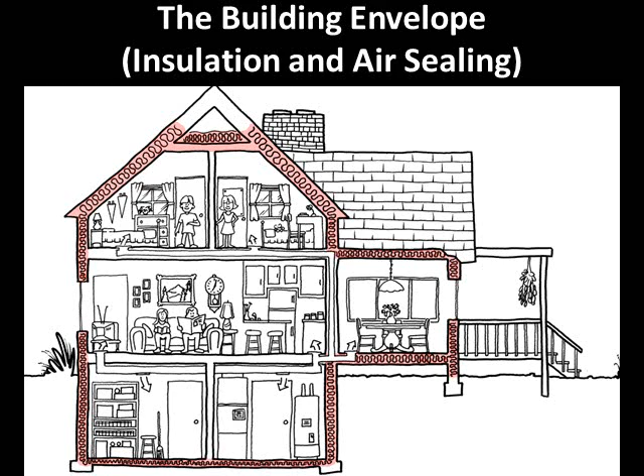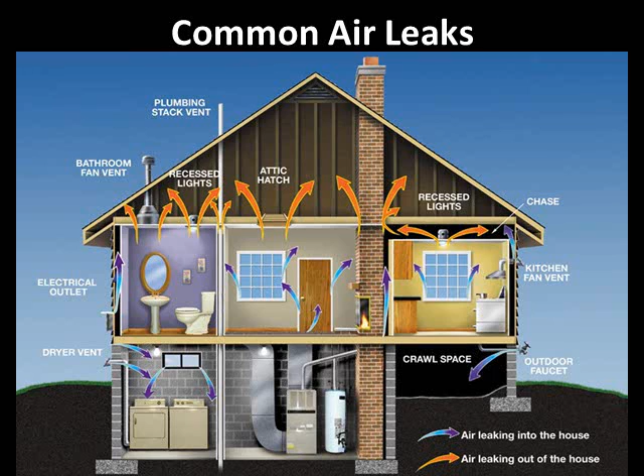Breaks in the building envelope result in uncomfortable drafts, hot and cold rooms, and serve as a route of entry for moisture, noise, dust, pollutants, and also pests.

Undesired airflow through the home can be a result of the stack effect. Take, for example, a cold winter day. Generally, hot air rises, so it tends to flow from the bottom of your house to your attic, where it will escape if you haven't air sealed that part of your house. When this happens, cold exterior air rushes into your basement to compensate for the warm air that has risen through your attic and gone outside. This creates a cycle, with cold air rushing into your basement, heating up, rising into your attic, and escaping outside, forcing more cold air to rush into your basement to compensate.

The adage, 'If your feet are cold, put a hat on,' also applies to air leaks in your home, and is a great example of the stack effect. Most of the cold air coming in, usually through the basement, is replacing warm air that is leaking out, mostly through the attic.

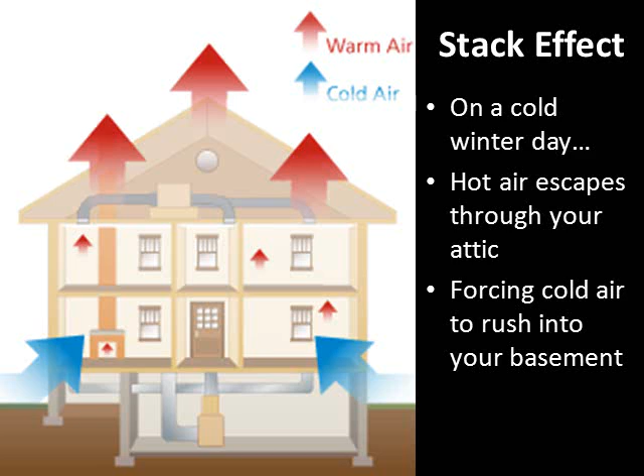I'm going to give you some examples of why it's important to take a comprehensive whole house approach. Many people consider air sealing on their own. If you decide to seal the air leaks you can detect, you could end up sealing some leaks while air rushes through the remaining leaks at a faster rate. This is much like putting your thumb over the nozzle of a hose—the air flows through a smaller space, but at a much higher rate.

Many people also consider insulating their attics on their own. However, if you add insulation but don't air seal, you could end up with a moisture problem. This goes back to the stack effect. In your attic, you have a thermal barrier but no air barrier, so the stack effect continues uninhibited and hot air keeps flowing into your attic and escaping outside. Because you've added insulation, the attic's temperature will be cooler, causing the hot air's temperature to rapidly drop, and the moisture in that air will rapidly condense, creating a moisture problem. This will also degrade the insulation, because it must remain dry to be effective.

There are two parts to a home energy retrofit. To take a comprehensive approach to home energy efficiency, it's important to first accurately diagnose the source of energy loss with a home energy assessment conducted by a building analyst. During the second part, technicians implement the most cost-effective recommended energy upgrades.

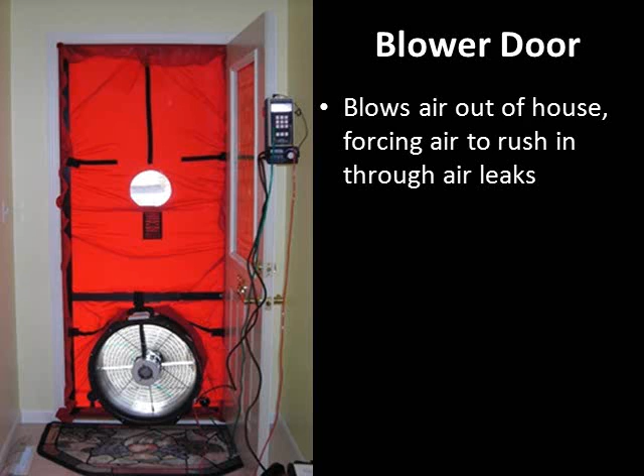The building analyst uses advanced diagnostic equipment to locate air leaks, determine the effectiveness of your existing insulation, rate the efficiency of your appliances, and measure moisture infiltration. One important piece of equipment is the blower door, which blows air out of the house, depressurizing it so that air rushes in through all of the air leaks.

This allows the contractor to do a number of things. First, the building analyst is able to accurately diagnose the location of air leaks with pinpoint accuracy. Second, the blower door also measures the rate of air infiltration in and out of the house, which allows the building analyst to use it for quality assurance.

By conducting a blower door test before and after the energy upgrades are completed, the building analyst is able to evaluate the effectiveness of those upgrades. Generally, the building analyst will determine a target level of airflow reduction. If the technicians do not meet that target, they will be sent back to do more air sealing.

Finally, the blower door serves as an important health and safety function. Using the blower door ensures that the technicians do not seal up the house too tightly. There is an optimal level of airflow in and out of the house, and too little airflow would result in an unsafe living environment—similar to placing a plastic bag over your house. The blower door ensures that the technicians hit an optimal level of airflow.

On the subject of health and safety, there is another reason to take a professional, comprehensive approach. A building analyst will always test combustion appliances like your furnace, boiler, and gas stove for carbon monoxide, an invisible, odorless, and toxic gas, as well as natural gas leaks. We do not recommend that you seal air leaks until you do a combustion safety analysis.

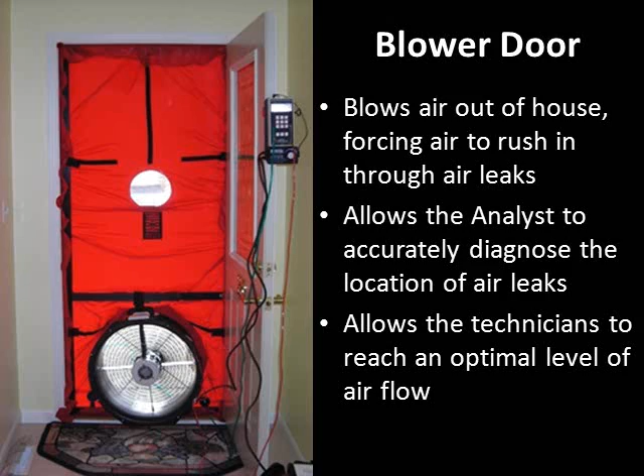After completing the energy assessment, the building analyst will produce a comprehensive report detailing the best opportunities for energy upgrades, prioritized from most cost-effective on down. Then, the contractor will work with you to select home energy improvements, secure financing, and obtain all available utility and government rebates.

Once you have selected your home energy upgrades, the second part of the energy retrofit begins. Highly trained technicians will perform the work of adding insulation, sealing air leaks, and installing custom solutions to energy loss. In order to maximize quality and effectiveness, approved contractors strictly follow Building Performance Institute standards, which are the highest standards in the industry.

Recommended improvements provide homeowners with immediate results. These include rooms that are quieter, more comfortable, and draft-free with consistent temperature, improved indoor air quality, reduced energy consumption, and guaranteed utility bill savings, improved home durability and reduced maintenance costs, and increased home resale value.

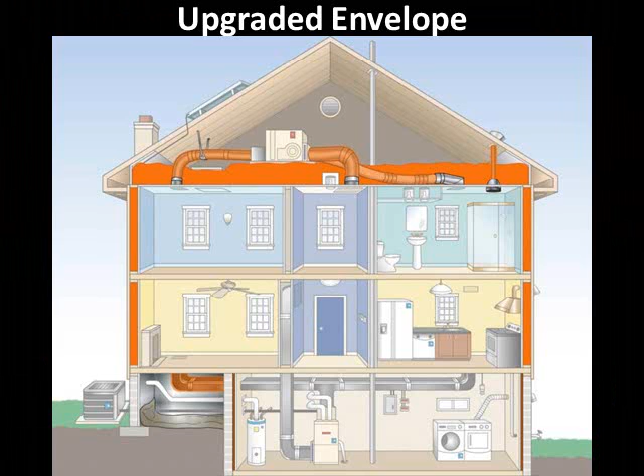These problems can be solved by air sealing. A good indication of air leakage are spider webs, because spiders like to build webs where bugs crawl in from the outside. Other opportunities for air sealing include holes where electrical wires, ductwork, and pipes penetrate walls, attic hatches, and leaky chimney flues.

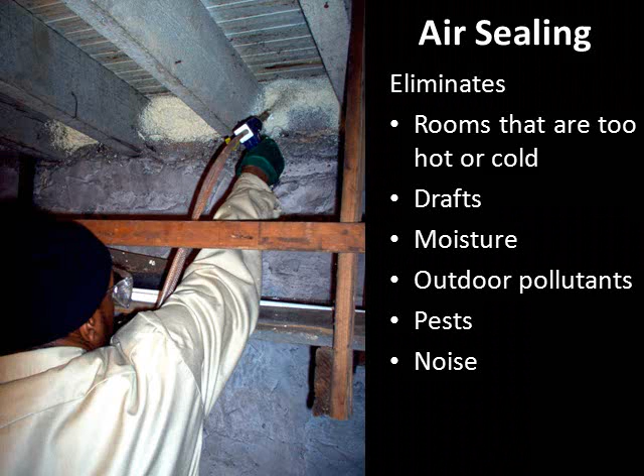As we mentioned earlier, properly insulating your attic can help regulate temperature in the rest of the house. Blown cellulose insulation is as effective in holding warmth in and has the added benefit of being cheaper as well as being eco-friendly.

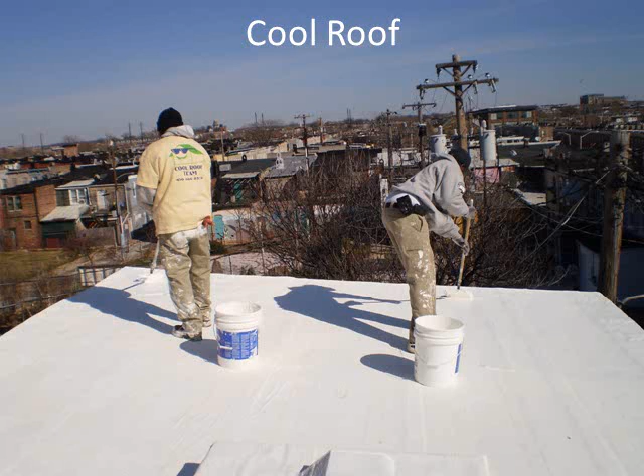We create roofs that improve individual buildings' energy efficiency and decrease the city's overall heat island effect. The term cool roof refers to roofing material with high solar reflectance and often high thermal emittance. On a hot summer day, traditional roofs may reach a temperature as high as 190 degrees Fahrenheit, while a cool roof will not reach temperatures above 120 degrees.

The smooth, bright white surface reflects solar radiation and releases a larger percentage of absorbed heat, reducing heat transfer to the interior of the building and reducing air conditioning demands. By applying a layered system of acrylic coatings with an embedded layer of woven synthetic fabric to the existing roof, we repair existing leaks, prevent future leaks with a 10-year warranty, and significantly improve the energy efficiency of the building.

Now is an exciting time to invest in a home energy retrofit. Maryland has lowered the cost of an energy assessment from $495 down to $100. The state is also providing a rebate that cuts 50% off the cost of the work, up to a total cash rebate of $2,000.

In addition, during the energy assessment, the contractor will provide you the option of having several energy savings measures installed free of charge. Valued at up to $325, these measures include an insulation blanket wrap for the water heater, insulation for your pipes, faucet aerators, low-flow shower heads, and up to 12 compact fluorescent light bulbs.

With these rebates, this work makes a lot of sense. You will net, on average, a 30% return on investment and recoup your initial investment in 3 to 4 years.

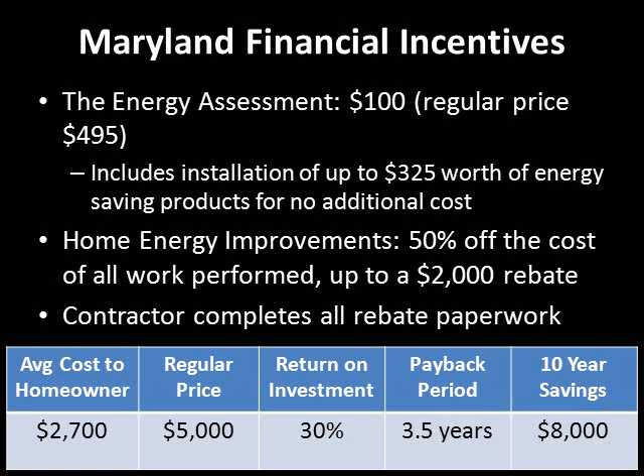We know that it can be a daunting process to find the right contractor. That is why we have done the work for you. We have created a pool of vetted and screened contractors to make sure they have a demonstrated history of performing high-quality work and providing excellent customer service.

The contractors sign agreements committing to quality work assurance standards. Homeowner feedback, among other metrics, is used to rank the contractors and determine whether they stay in the pool, so they have a strong incentive to provide excellent service.

As a nonprofit, Civic Works is committed to raising the training standards in the industry. Many of the technicians have completed the Baltimore Center for Green Careers 3-month training program, and most have years of additional experience. The training program provides technicians with hands-on experience and several industry-recognized certifications. This is the most comprehensive program in the Maryland region.

Once you've decided to invest in a retrofit, one of our energy advocates will assist you through each step of the process. He or she will provide you with personalized assistance, answer questions, and address any issues you might have.